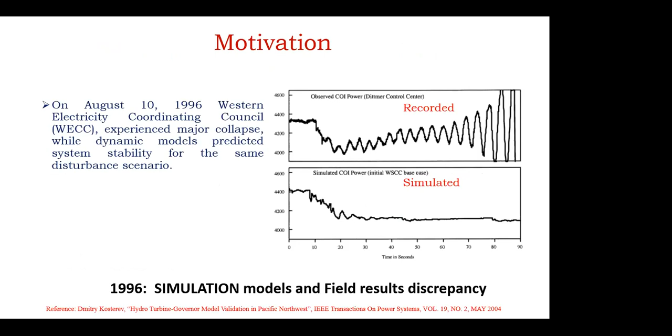To start with the motivation, you can see in this slide that in 1996, when we experienced a major collapse in WSCC, the recorded waveforms actually showed grid collapse, but the simulation models predicted well-damped or sustained oscillations in the system. There is a discrepancy between the records and the simulated data.

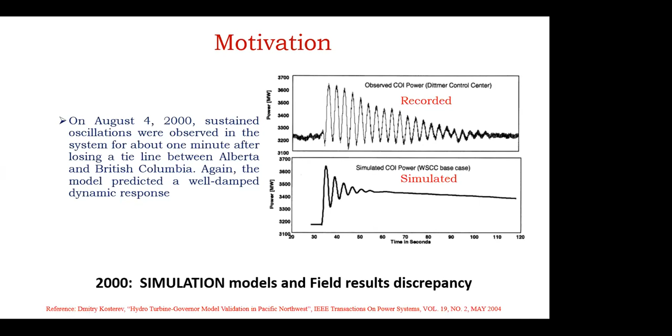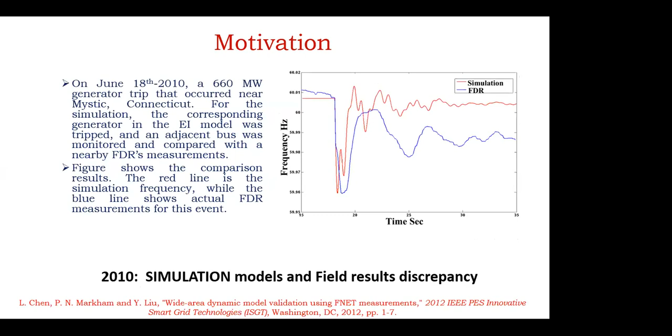Later, even in 2000, due to a tie line loss, in case of this disturbance again, the recorded data shows that there are damped oscillations, but the simulation shows that there are not even significant oscillations. The system is well behaving. Similar kind of discrepancies are observed in 2010 in the case of a generator trip, and the frequencies of the simulation data and the recorded data don't match. The same is the case in 2011.

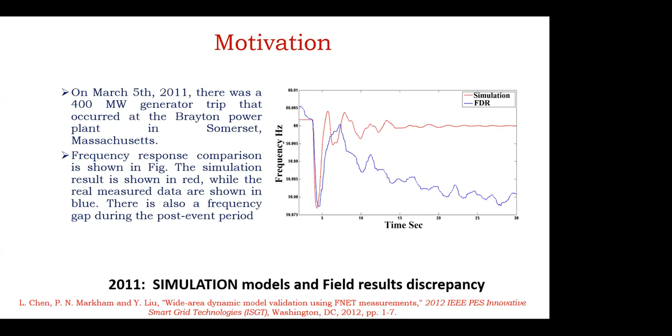These are the kind of cases power system engineers have been observing in the grid, and that's where it was made mandatory, especially in North America, that utilities, meaning the power generation companies, supply the generator dynamic data, and they also need to update this data every 5 years by validating it. A similar exercise also started in India, the country where we are from. The National Thermal Power Corporation made it a starting point to estimate the parameters of a couple of generators in India. So they started this practice.

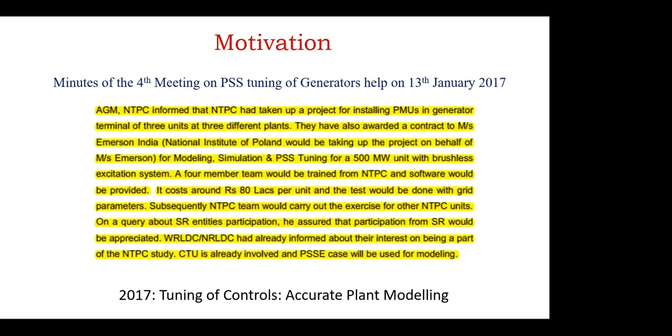So in order to understand, whenever you have a disturbance, whether it is going to lead to a blackout or what kind of consequences we are going to get, we definitely need the parameters or the dynamic data of a generator. And if you look at how this dynamic generator data is obtained, in the majority of cases there is online parameter estimation using phasor measurement unit data. In this case, we take the data from the terminals of a synchronous generator using the phasor measurement units.

These phasor measurement units give us four parameters majorly, that is real power, reactive power, voltage, and phase angle. In most estimation techniques, people take any 2 of these variables as inputs and try to validate the system data to match the remaining 2 variables as outputs. So if you take real and reactive power as inputs, then you'll consider voltage and theta as outputs. And if you take voltage and phase angle as inputs, then you take real and reactive power as outputs. This is the major problem formulation in parameter estimation or model validation.

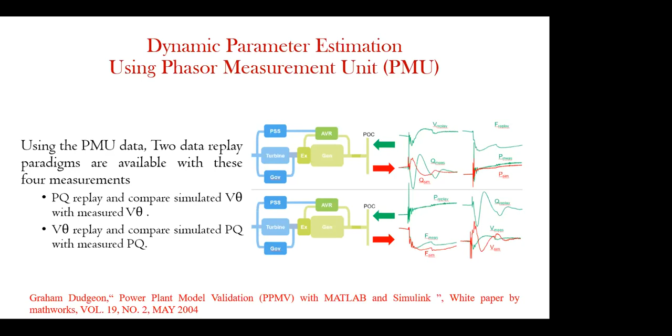The other aspect is that people started using digital fault recorder data, DFR data. In the case of DFR data, you don't have only terminal recordings; you also get the field parameters, meaning the field voltage and field current as additional measurements. And then the same procedure is followed to estimate the parameters.

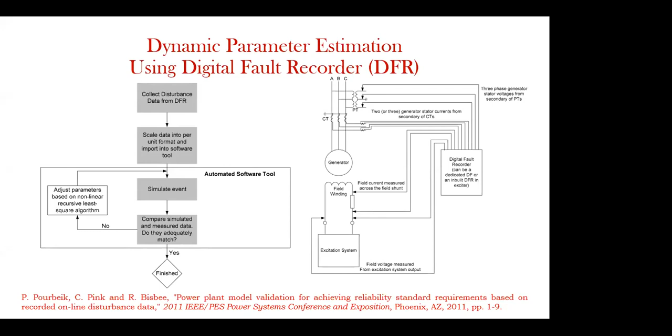But the problem with these two is that, especially in a country like India, we don't have PMUs at every node or every substation. And DFRs also don't record this data in all the plants. So if you want the dynamic data of a plant where you don't have PMUs and no DFR recording the data, how do you handle that? That's where we have come up with estimation of this data using digital protective relay records, because this relay is there for every generator.

So when you take a generator and PMU or DFR data, try to compare the differences between these two. This PMU or DFR data is more or less available at a substation level.

So it gives you the aggregate model of the entire power plant. And in some of the cases, this PMU or DFR may or may not be available. But if you look at the DPR, protective relays are there for the individual generators so that you'll be able to get the generator parameters individually. And you definitely have this DPR, and you don't have a question of not having it.

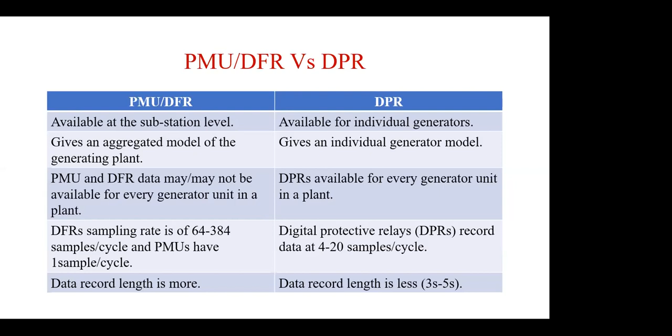But the issue with the DPR data is it records data for a shorter duration. Of course, there are advanced DPRs which will record the data for longer, but DPRs are already there in the majority of the plants which are recording the data for 3 to 5 seconds as per our survey from the different power plants. So the sampling rate of this was also less compared to DFR, of course, much higher compared to the PMUs.

So our objective of the problem is when you don't have the availability of PMUs or DFRs, it is better to estimate the data of the dynamics of the plant using the protective relays. But the problem with this is the recorded data is only of 3 seconds length, in which case you have 1 second pre-fault data and 2 seconds post-fault data, and the sampling rate is 1 kilohertz.

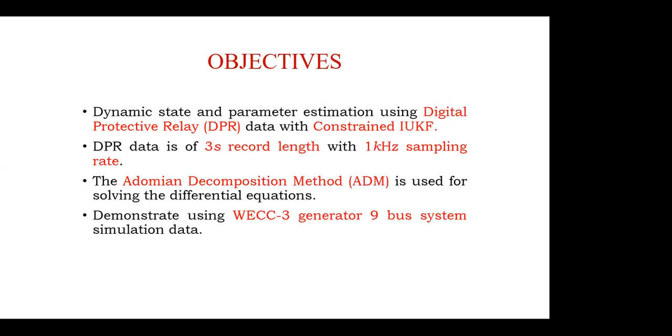In order to achieve the estimation within this 3 seconds recorded length, we have gone for the constrained iterative unscented Kalman filter based estimation. And also for the simple calculations and the accurate estimation of the states and parameters, we have opted for the Adomian decomposition method for the differential equation solutions. So the proposed approach has been validated using the WECC 3 machine 9 bus system data.

Now, at this stage, if you try to look at what is this unscented transform, of course, most of you might be well aware that this unscented transform is based on the idea that it is better to approximate the probability distribution than the random nonlinear functions. So unscented transformation is actually meant for getting the statistics of the random variables which undergo a nonlinear transformation.

So if you just look at the actual or the fundamental methods like particle filters, where you will be taking the vast range of samples which will go through the same nonlinear transformation, but the output covariance and the mean may not be lying within the specified limit. And the second case, the example with the extended Kalman filter, where you approximate the nonlinear function, then you will see that your output mean as well as the covariance will not be within the specified bounds.

And if you look at the unscented transform, your sigma points are strategically chosen using the specific mean and the covariance so that your output will have the mean as well as the covariance close to their true mean and covariance. And this is actually the basic way where the equation shows that you will be generating your sigma points based on the covariance matrix, and then those sigma points are transformed onto the output. Every sigma point will be having the corresponding output, and then you will get your output mean and output covariance, how in the figure they are matched. So this is what is the unscented transform, and this is what is used in the unscented Kalman filter.

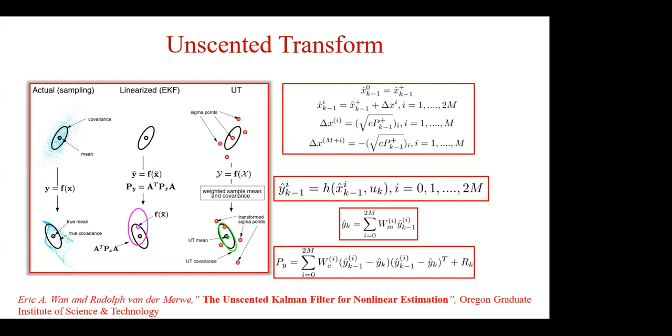So what we do in this unscented Kalman filter, we'll start with the initial state. That's an approximation. How best you approximate is also the important thing. And then you will be having the state covariance matrix, how this initial state will be different from your actual state. And using these two, we will be generating the sigma points of the states based on the previous expressions I have given. And then we will also get every sigma point's corresponding measurement point in the second step, and we will get the predicted state as well as the predicted measurements.

So then this predicted state and predicted measurements will be used to get the measurement covariance and cross covariance, and then these measurement covariance and cross covariance matrices are used to get the Kalman filter gain, and they will give us the state estimate and the state covariance matrix. Again, this is actually for a particular time step, and for the next time step, if you wanted to have the state estimate or the predicted state, then we'll use our dynamic equations in the time update to get the sigma points and then the corresponding covariance.

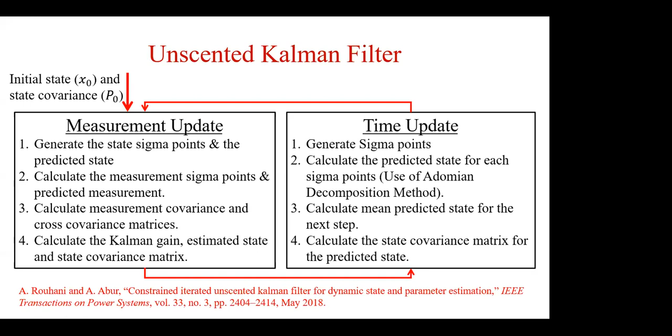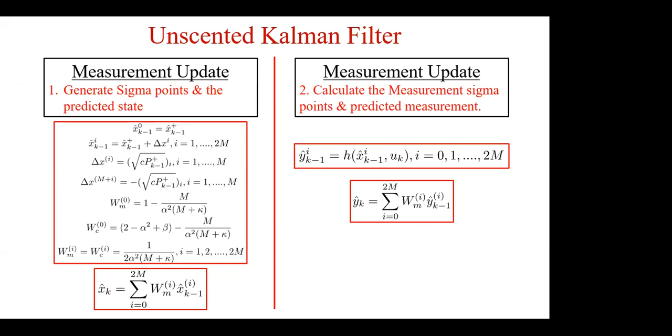So how this is mathematically done is given as each step here. The sigma point selection and then the mean calculation is as described in the unscented filter, and each sigma point's corresponding output will be calculated, and we will get the weighted mean of the measurements and the weighted mean of the sigma points. And these two, the weighted average measurement and the sigma points, are used to get the output covariance and cross covariance matrices.

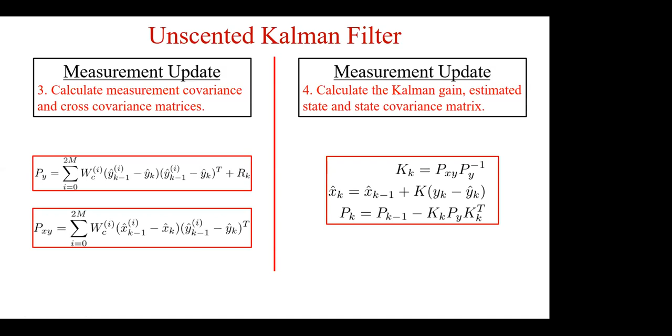So this output covariance and cross covariance matrices will give us the Kalman gain. And based on the Kalman gain, we'll be able to get our predicted state and the covariance matrices. And this is one step. And if you wanted to go for the time update, based on this predicted state, we will again use the covariance that we got in the previous stage to get the sigma points.

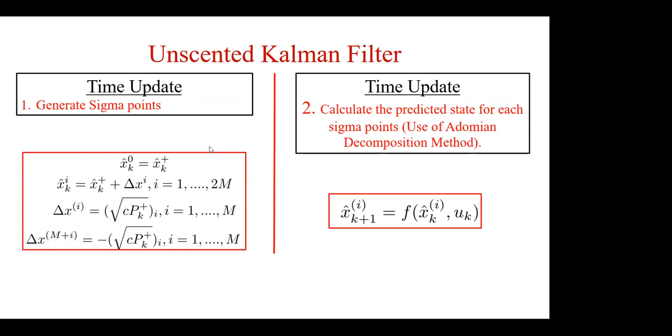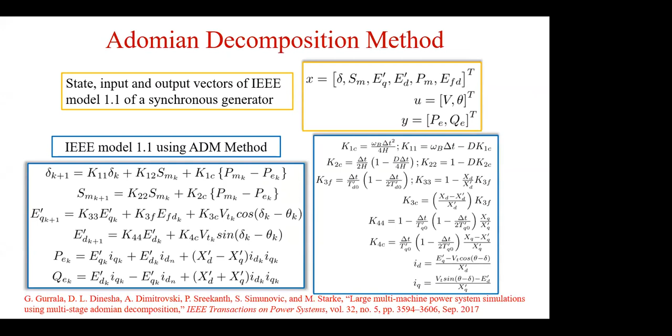And all the sigma points are transformed to the next time step using the dynamic equations of the power plant model. Here we have used the 1.1 standard IEEE synchronous generator model, where the Adomian decomposition based synchronous machine equations are taken from the specified reference, and they are used to get the time update for the synchronous machine equations. And then after getting all the data points, again, the weighted mean will give us the predicted state and the state covariance matrices. And this is the basic unscented Kalman filter.

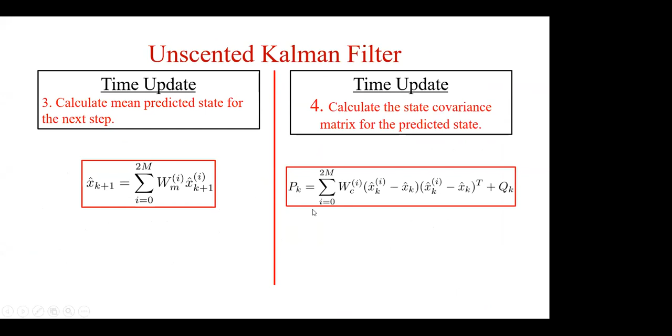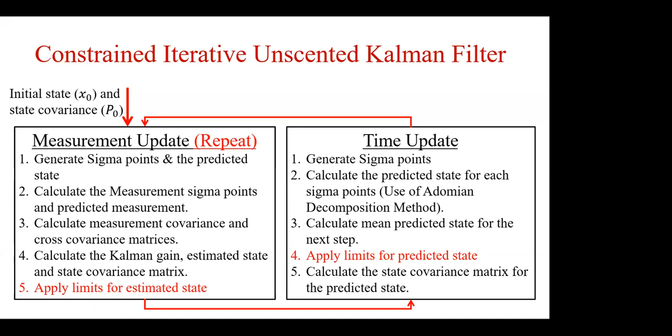And the simple difference between the constrained iterative unscented Kalman filter and the unscented Kalman filter is that this measurement update is repeated multiple times in order to use the single data points a number of times. And again, at every point when we get our state estimate, we will try to limit that state within its upper and lower limits. If it is exceeding the maximum value, we will restrict it to the maximum. If it is going below the minimum value, we'll restrict it to the minimum. So that's how we apply the constraints as well as iterate multiple times in the measurement update itself. So this is what the CIUKF is.

And now in order to get the DPR data, we have actually surveyed DPR recordings from various plants and got to understand that these DPRs are 3 seconds of data, with 1 second pre-fault data and 2 seconds post-fault data. The same kind of data with 1 kilohertz sampling has been generated using the RK4 method in MATLAB simulations. And then we have taken the corresponding P, Q, V, theta from the simulated data, and we used this P, Q, V, theta for the parameter estimation using our CIUKF.

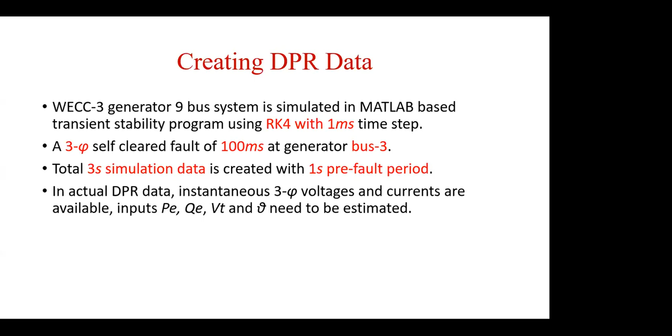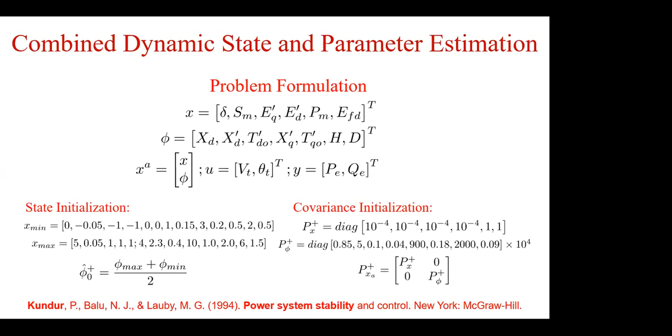So the states are chosen like this. These are the states of the synchronous machine, and the parameters to be estimated are represented by phi. And we will be forming an augmented state matrix using the states to be predicted as well as the parameters to be predicted. Our inputs are voltages and phase angles, and outputs are considered as P and Q. And while initializing the states, we have taken the parameters as the average of the minimum and maximum limits of every parameter given in our standard reference, Power System Stability by Kundur. And also the covariance matrix is given as follows.

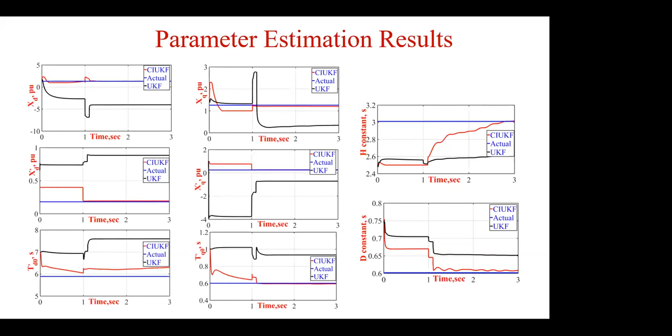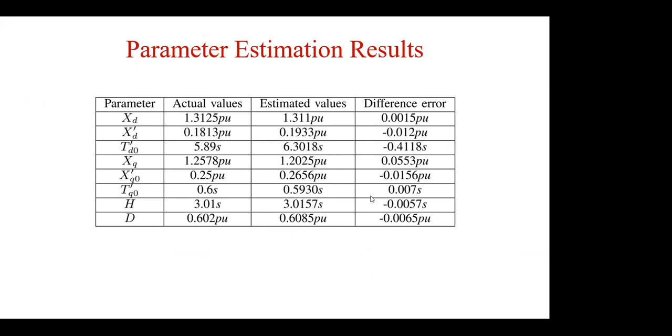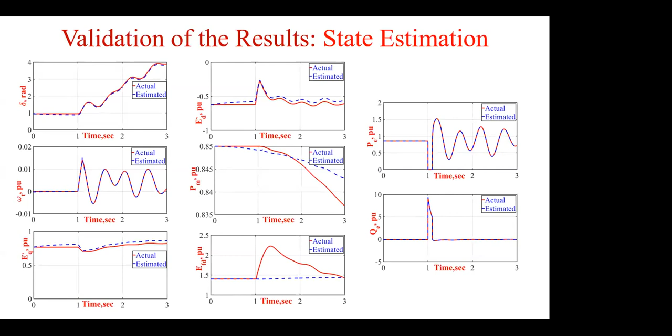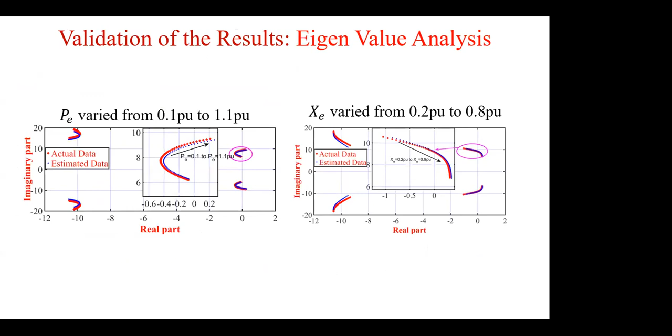And again, the parameters estimated are used to get the eigenvalue analysis of the synchronous generator, and you can see that the critical PE as well as XE are well approximated using the estimated parameters. So we'd like to conclude that.

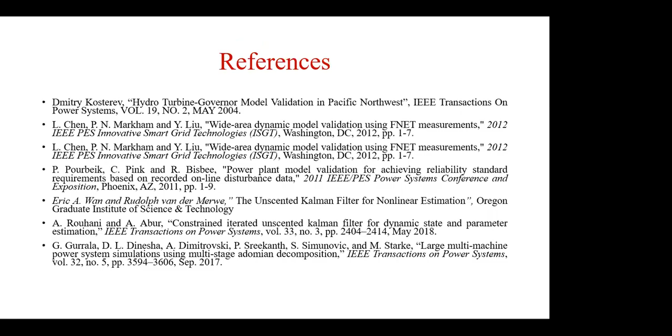As a contribution of our work, we have estimated the parameters using the digital protective relay records and selected a CIUKF method in order to achieve the target of estimating parameters in 3 seconds. And for better accuracy, we have used the Adomian decomposition method and validated it using WSCC 3 machine 9 bus system data. These are the references, and thank you.